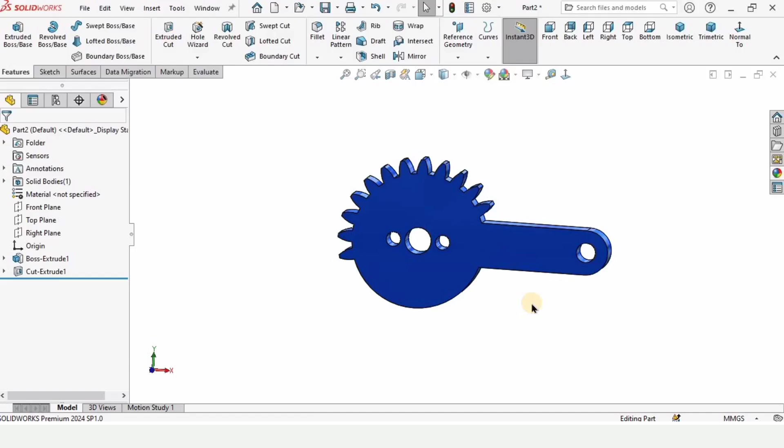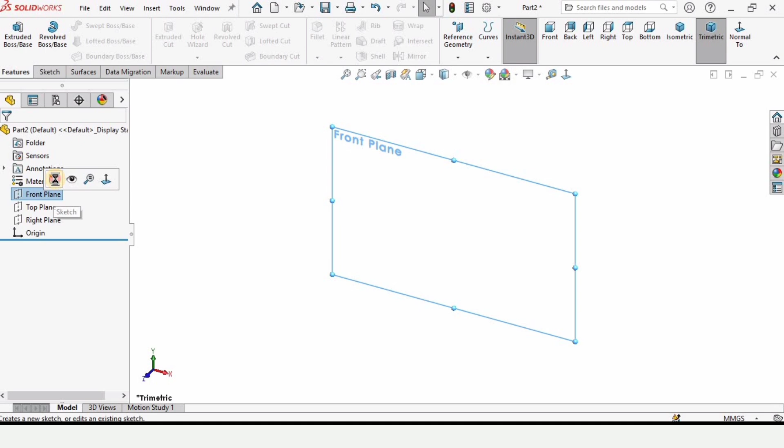First I'm gonna click on File, click on New, select Part, and click OK because we are working in a part file. I'm gonna change the background to plain white and make sure we're working in mmgs as units. Then I'll click on front plane, click Sketch, select the center line, and create a horizontal line.

I will make sure this line is horizontal, then specify the dimension for this line, which is 30.75 millimeters.

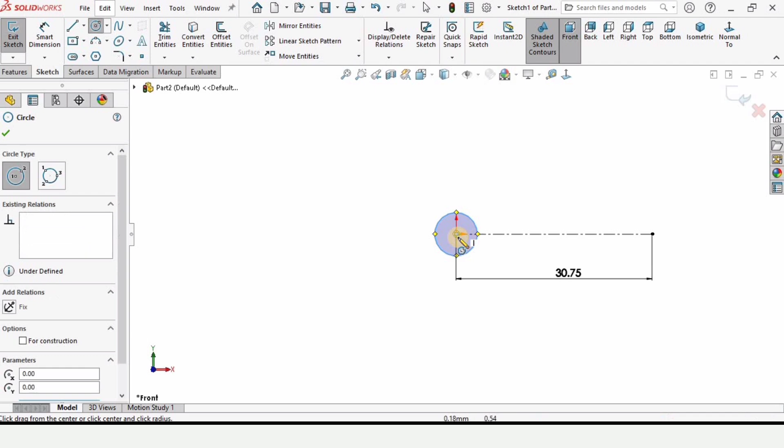Then I'll create a circle here, a bigger circle, and a smaller circle. The diameter for this circle is 3.5 millimeters, and also 3.5 millimeters for this one. Then I'll specify the diameter for this circle as 24.18.

I will select a midpoint line and create a vertical straight midpoint line, make it construction geometry first, and assign the dimension as 29.26 millimeters.

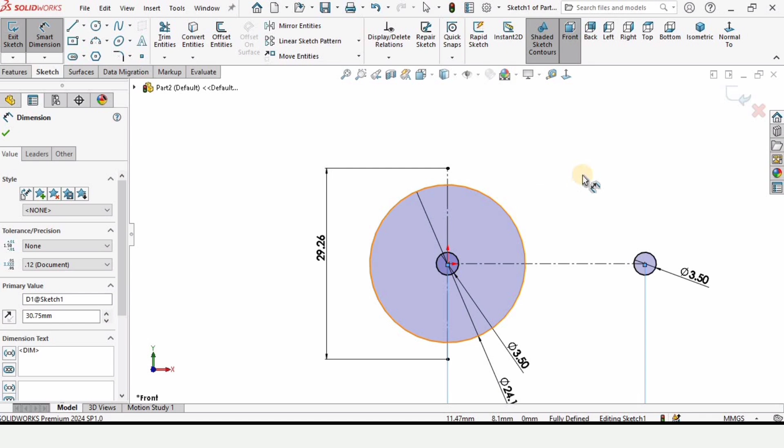Then I'll select the 3-point arc. I'll select the first point, the second point in space, and the third point in space, and specify the radius for it.

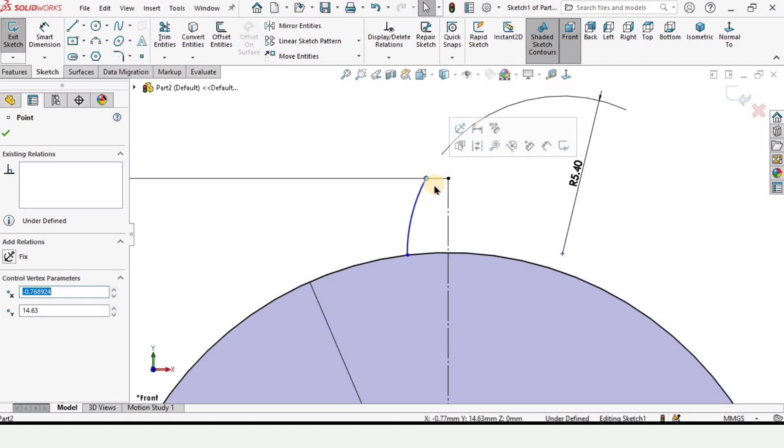So the radius is 5.4 millimeters. I'm gonna drag it here, hold the control key, select these 2 points, make relation horizontal, and create a horizontal straight line like this, then specify the dimension.

This is going to be 0.31, and the distance from here is going to be 2.08 divided by 2, that is 1.04. You can directly write it as 1.04.

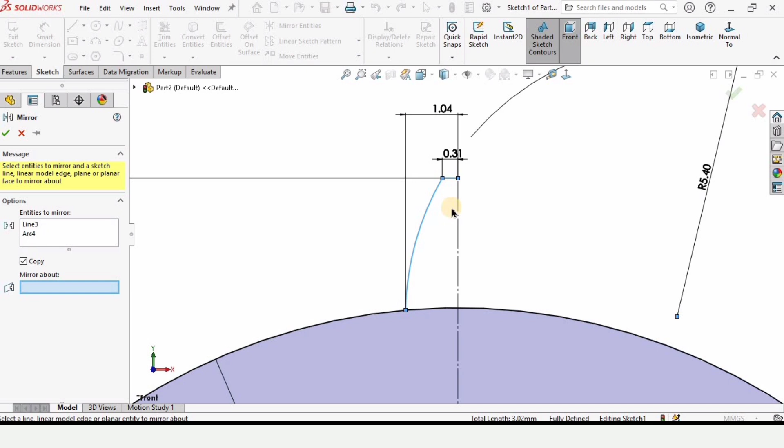I'm gonna mirror the same thing on the other side. I'll select these 2 things and mirror about this vertical line, and it's gonna get mirrored like this.

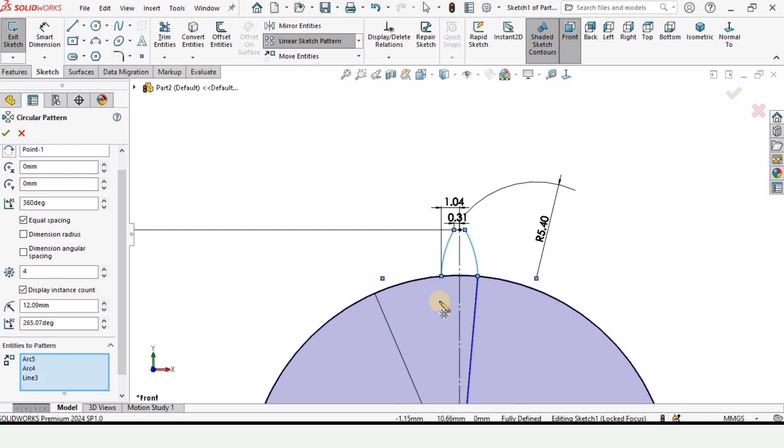Now I need a circular pattern, so I'll select circular pattern, and in the parameter window, first I'll select the midpoint, then select entities to pattern: this arc, these 2 arcs, and this line — 3 things, 1 line and 2 arcs. I'll adjust settings so equal spacing is selected.

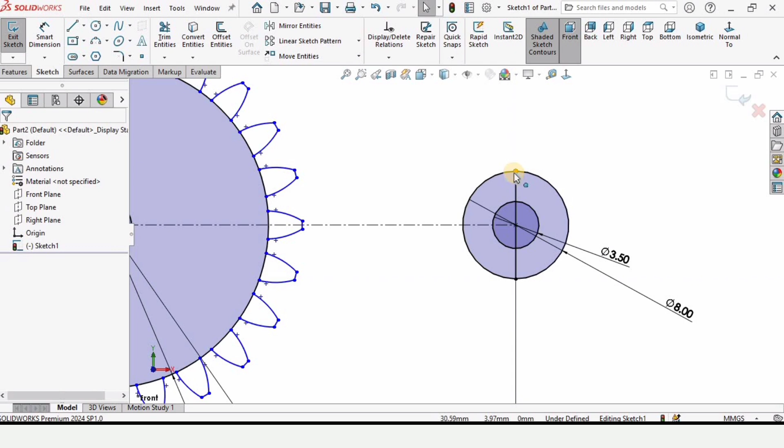Then I'll select a midpoint line and create a midpoint line like this, make sure it's construction geometry, a center line. Then I'll trim these 2 sides and create a line connected up to the circle.

I'll make another line like this. I'll select this line, make relation horizontal. This is giving us an error, so I'll delete this line.

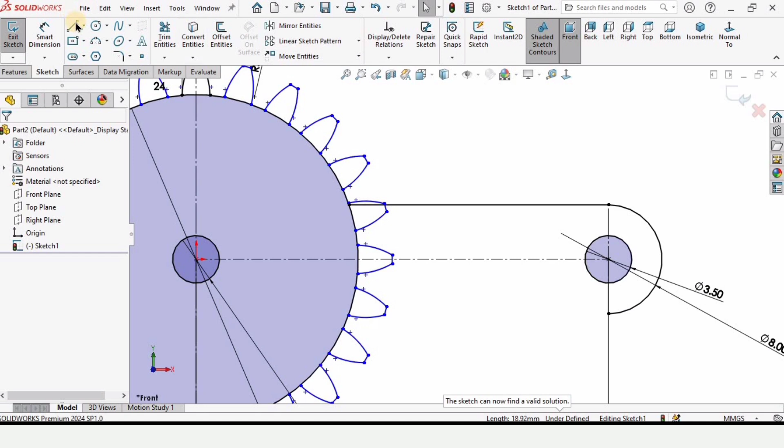Then I'll select mirror entities, select this line, and mirror about this line. We have multiple ways to model things.

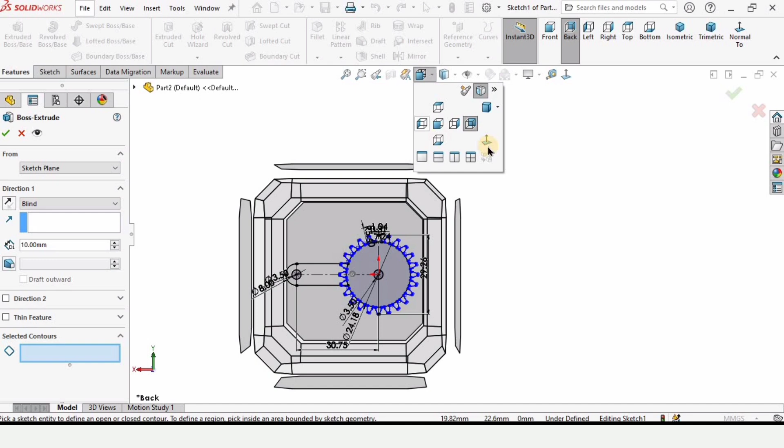Then I'm gonna select extruded boss base. You need to make sure you have selected normal to this position.

In selected contours, I'm gonna select this one, the second one, and now I'm gonna select 1 2 3 4 5 6 7 8 9 10 11 12 13.

Check the box. So we need to make some adjustments. Right click here and click on the first option, that is edit feature. You can go to it from here as well. Make sure you've selected these selected contours.

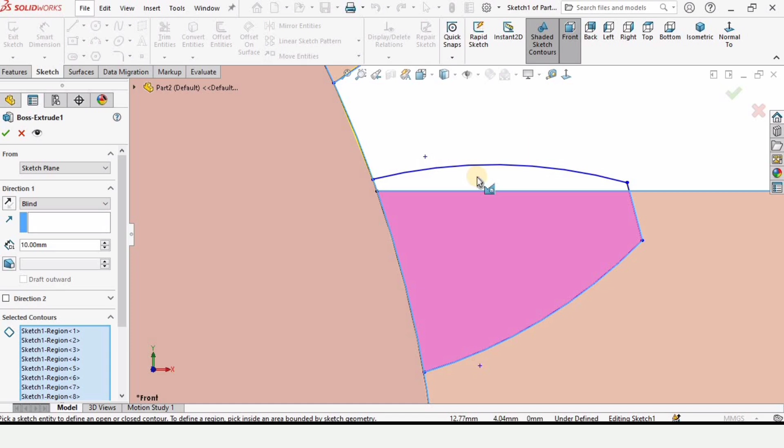You can select these things. Now I'm not gonna select this curve and this curve as well. I'll check the box.

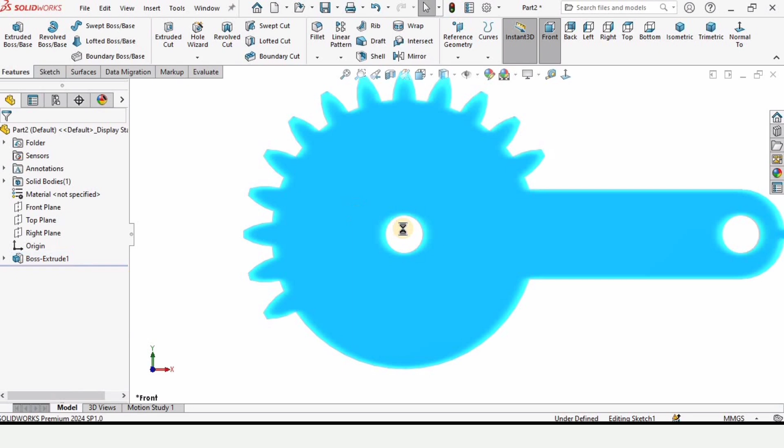Let's count the teeth. Right click and go back to edit features. So this is going to be 1 2 3 4 5 6 7 8 9 10 11 12 — we do not need 13, so I'm gonna uncheck this one. We need only 12 teeth. These are the 12 teeth that are visible.

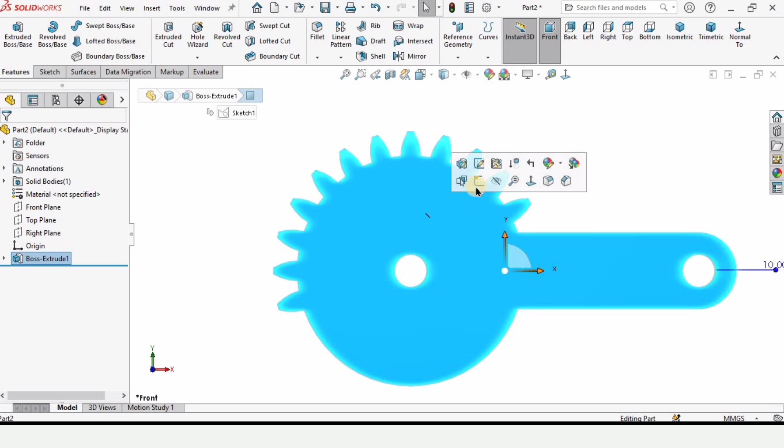So I'm gonna select the front face and click on Sketch. I'll create a midpoint line and make sure it's horizontal and construction geometry. The length of this line is going to be 9 millimeters, so I'll specify it here.

Then I'll create 3 circles: 1, 2, and the third on the midpoint. Then I'll assign the diameter — this is going to be 2.6 millimeters, same 2.6 millimeters for the corner circles, and the middle one is going to be 4.8.

Then I'll go to Features, select Extruded Cut, and specify Through All, then check the box.

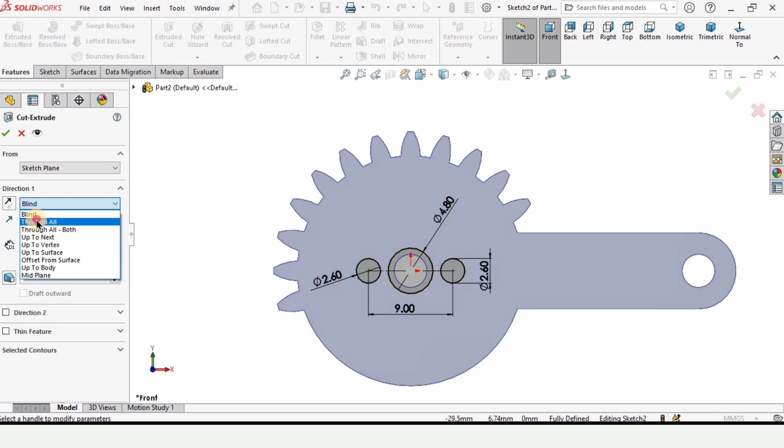So this is ready, the gear link is ready, and this is an optional step. If you want to render or assign any appearance, you can do it like this. By the way, this is optional, and this is our gear link.

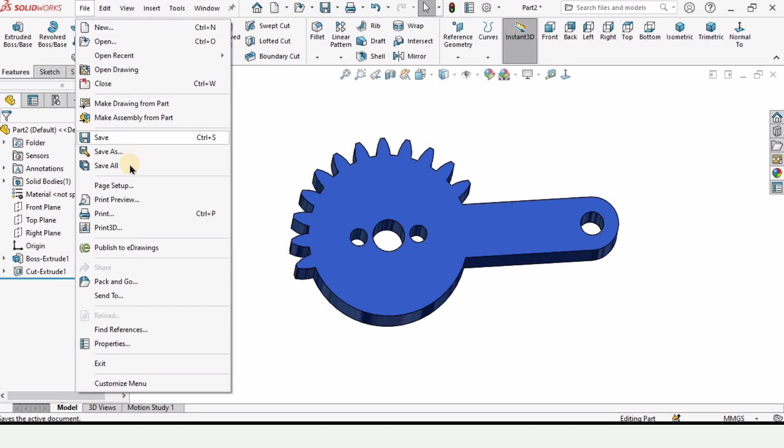So I'm gonna save this part, and for that I'll go to File, click on Save As, and save it as gear_1.